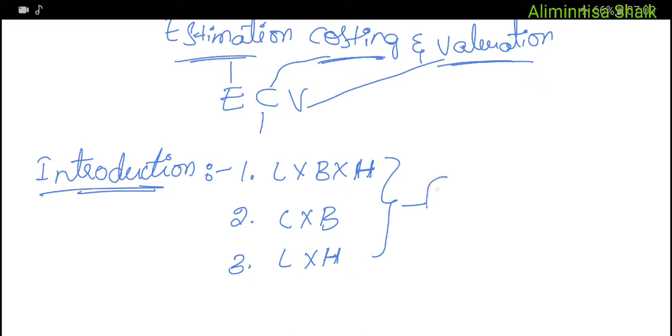Using these three categories, we generally estimate the cost of construction. It is therefore necessary to prepare the probable cost or estimate for the proposed work from its plan and specification. For these calculations, we generally use the plan of the structure, that is design, drawing, everything, and the second one we use is specification.

For calculating our estimation, we generally use plan and specification. Otherwise, it may so happen that the work has to be stopped before its completion due to shortage of funds or materials. Besides this, an estimate for any public construction work is required to be prepared and submitted beforehand so that sanctioning of necessary funds may be obtained from the authority concerned.

Estimation is generally prepared by calculating the quantities and cost of the various items required in connection with the work. Here we have different items or different requirements based on which the cost of construction can be estimated.

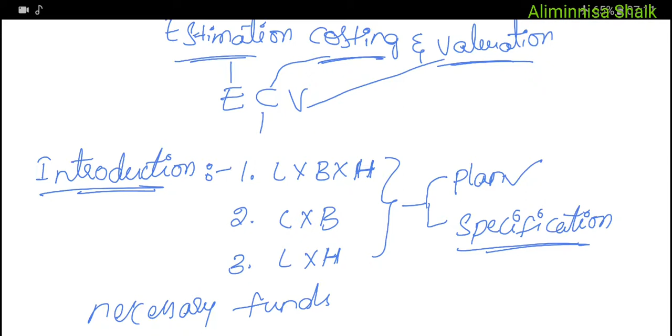Now let us move on to the next topic, that is purpose of estimation. Mainly this purpose of estimation contains 9 different purposes in which estimation for a work or project is necessary, mainly for the following purposes. First one is to ascertain... let me write it first. Purpose of estimation.

In this purpose of estimation, this is categorized into 9 types or 9 purposes. The first one is to ascertain the necessary amount of money required by the owner to complete the proposed work. For public construction works, estimations are required in order to obtain administrative approval, allotment of funds and technical sanctioning. That is the first purpose of estimation.

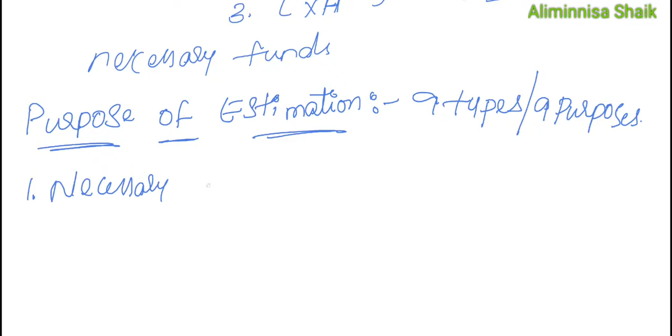This is generally used to ascertain the necessary amount of fund required for major projects.

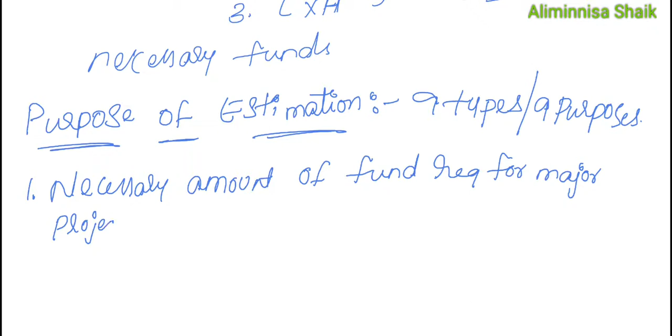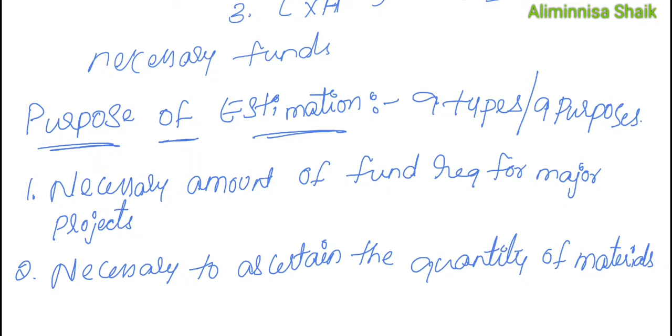The second purpose is to ascertain quantities of materials required in order to program the timely procurement of controlled materials like cement, steel, etc., which are high in cost. This is necessary to ascertain the quantity of materials, not only cement and steel, but different materials, though the cost of cement and steel is more compared to other materials.

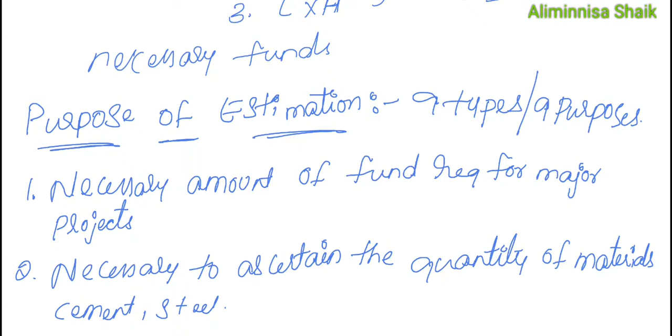So this is the second purpose of estimation, to calculate the quantity of materials required for construction. The third purpose is to calculate the number of different categories of workers that are to be employed to complete the work within the scheduled time of completion. This is required to calculate types of workers.

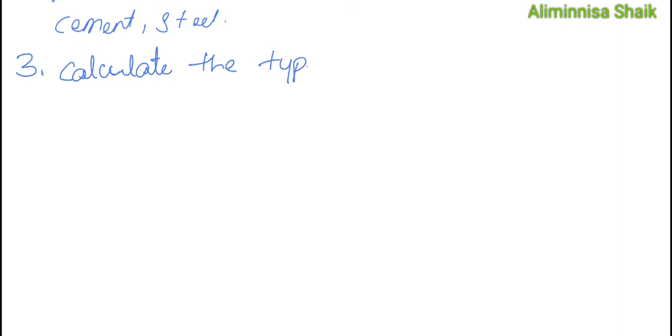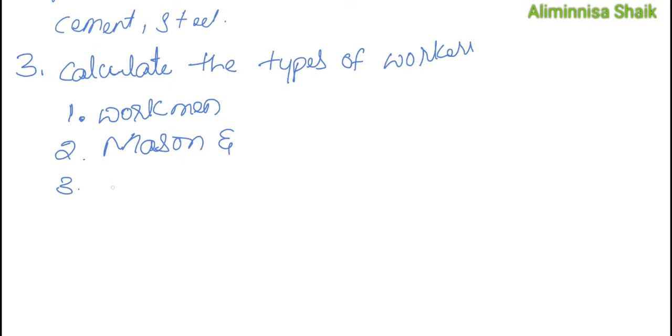Types of workers means, generally we have 3 types of workers. First one is workmen, mason, and female workers. These are the different types of workers basically used in any type of construction. So the third purpose is to calculate the types of workers and how many persons are required for the completion of the work for every day. That is the third purpose.

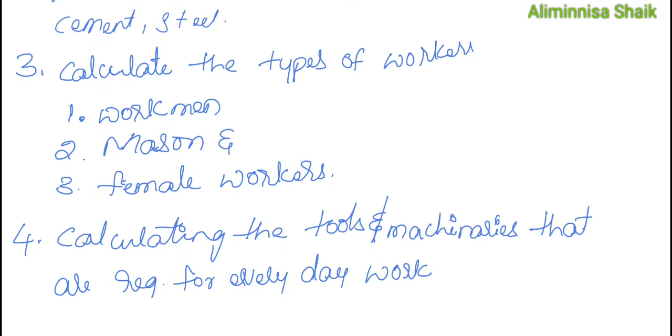Next, the fourth purpose is to assess the requirement of tools, plants and equipment required to complete the work according to the program. This is for calculating the tools, that is machinery, tools or machineries that are required for everyday work, because every day we don't use both tools and machineries at a time. Basically for the footing steps we go for tools, and for higher constructions we generally go for machineries. This is the fourth purpose of estimation.

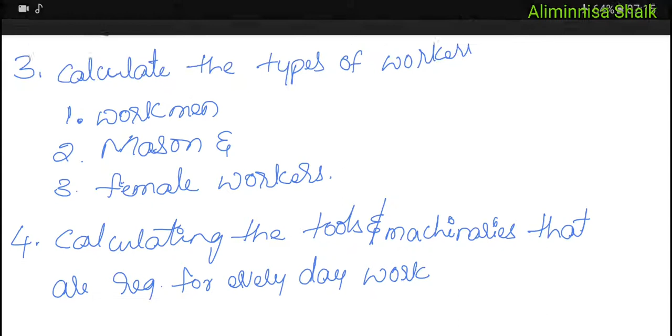Now let us go to the fifth purpose. Let me go to the next page. Next, fifth purpose is to fix up the completion period for the volume of works involved in the estimation. Fixing up of work is done in the fifth purpose.

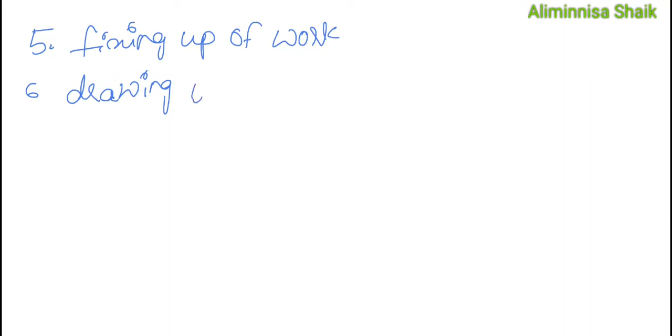Next, sixth purpose is to draw up a construction schedule and program, and also to arrange the funds required according to the program. Here we'll be drawing up the schedule, which is nothing but where we'll be collecting materials, men, machineries, everything whatever is required during construction. That is the sixth purpose. Generally we have a different subject for this, PERT and CPM, where we'll be learning how to schedule the works.

Now our next purpose is to justify the investment from benefit cost ratios. Here what we are going to invest and how much quantity of work that is going to be completed during that day, we'll be doing a benefit cost ratio.

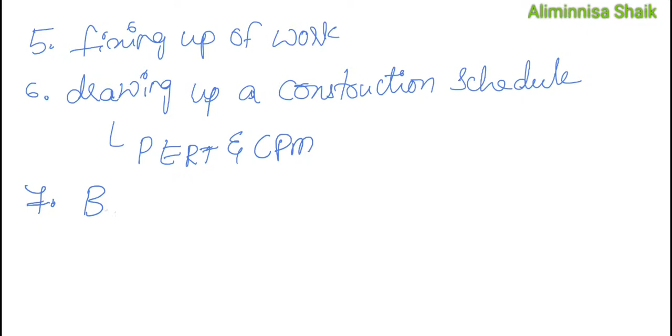And the seventh purpose, and the eighth purpose, is to invite tenders and prepare bills for payments. Here we'll be inviting tenders and contracts for high-rise buildings or high-rise structures.

And the last purpose is an estimate for an existing property is required for valuation. For any existing property, valuation and estimation is basically required. That is our ninth purpose of estimation. Now let us move on to the next topic, that is general items of work in building. Let me go to the next topic.

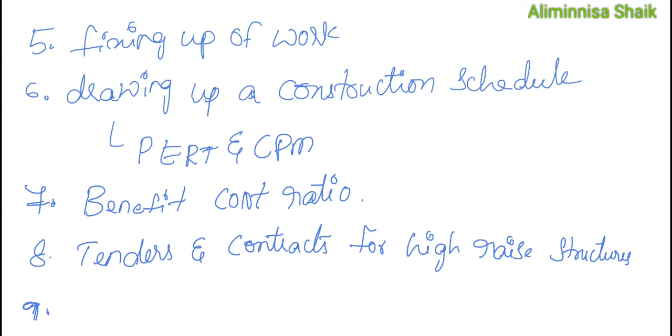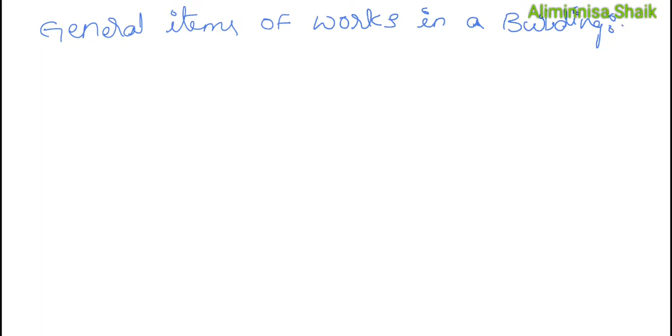General items of work. I'm writing it here. General items of works in a building or any structure. Let me write building only. This is the general items of work involved in the estimation for a building, along with the process of calculation, listed below.

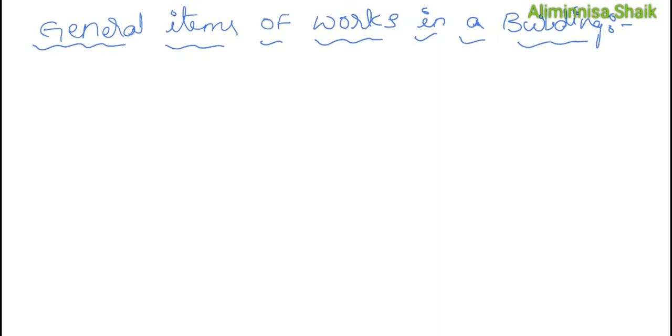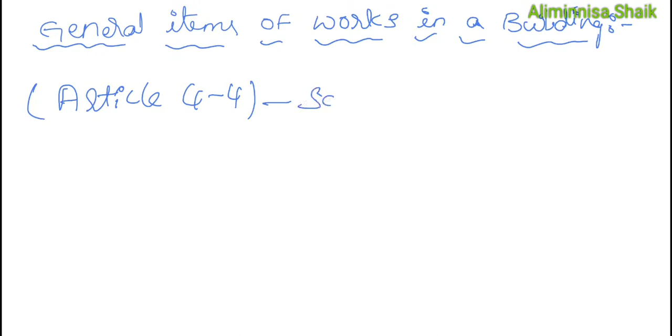The unit of payment and mode of measurements are classified based on the mode of measurements from Article 4.4, which is used for scheduling cost or specification. The nomenclature of the items are given in the abstract of building estimates.

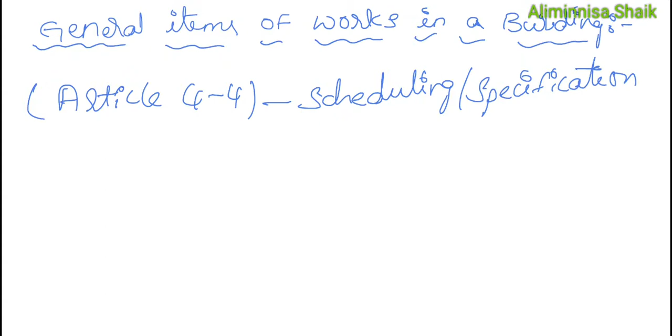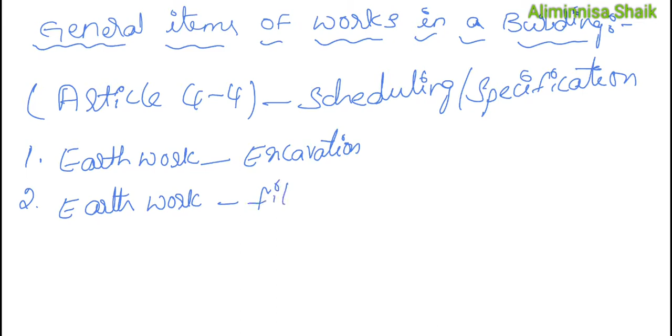The general items of work for buildings, we basically have 18 types of general items of works. Let me write one by one. First one is earthwork in excavation for foundation trenches. Second one is earthwork for filling. So the first one is for excavation, second is for filling. Third one is brick flat soling.

Next, cement or lime concrete in foundation. Next one is masonry work in foundation and plinth.

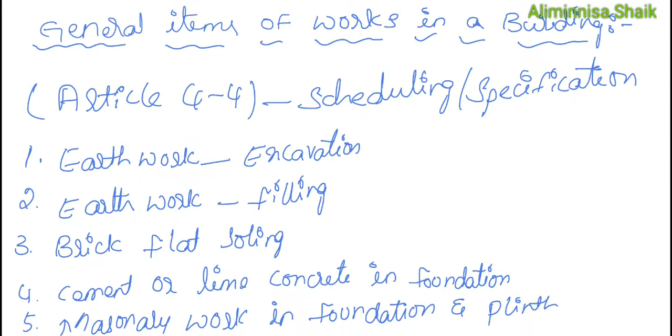Before going to the next page, let us know what each work means. Earthwork in excavation is where earth is excavated for foundation trenches. Trenches are nothing but openings where we'll be putting our footings, to the exact width and depth of foundation, with vertical sides and the bottoms leveled both longitudinally and transversely.

The quantity of earthwork is calculated in cubic meters. Generally both earthworks are calculated in cubic meters, by multiplying the actual required length. This multiplication process, as I said before in the introduction, we basically do in three different types. First is length, breadth and depth. Second one is length into breadth. Third one is length into depth, or length into height.

So those are the three things. When we get this cubic meter, we will be calculating it in all three dimensions, that is length into breadth into depth or height, it may be D or H. This earthwork is basically measured in cubic meters, where we will be calculating the length of the excavation, breadth of the excavation, and depth or height of the excavation. That is about earthwork.

When it comes to earthwork in filling, earthworks are engineering works created through the process of moving massive quantities of soil or unformed rocks. Earthwork is done to reconfigure the topography of a site to achieve the design level, and this involves cutting and filling to achieve the required topography.

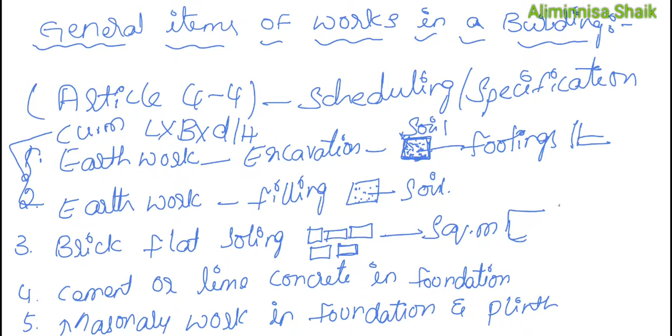Soling is worked out in square meters, calculated as length into breadth, or length into depth or height. When we get cubic meters, it is in all three dimensions. When we get square meters, we are calculating the values in only two directions, whether length into breadth or length into depth or height. That is about brick flat soling.

Now let us move on to the next topic, cement or lime concrete in foundation. The volume is computed in cubic meters, meaning length, breadth and height - all three dimensions are used. The dimensions of length and breadth for concrete remain the same as that of earthwork when the sections of all walls are constructed. That is about cement or lime concrete in foundation.

Now let us move to the fifth one, masonry work in foundation and plinth. Here the volumes of different offsets of layers and plinth walls are calculated one by one in cubic meters, multiplying their individual length, breadth and thickness or height. Instead of using depth and height, we calculate it using length, breadth into thickness.

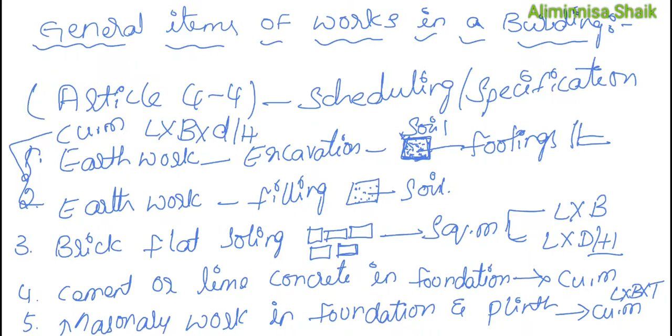Okay, we have completed 5 types. Now let us move on to the next work.

The sixth one is damp proof course, which is called DPC.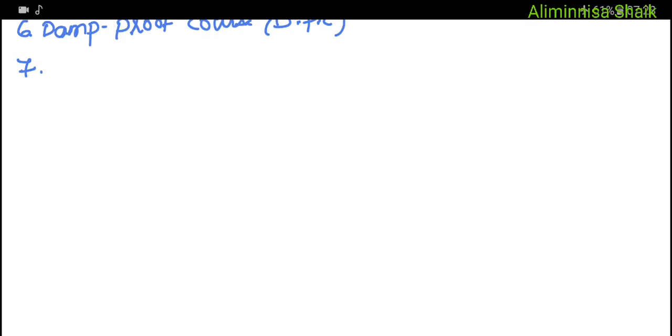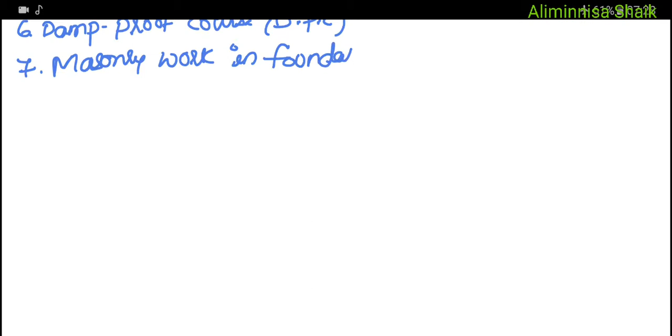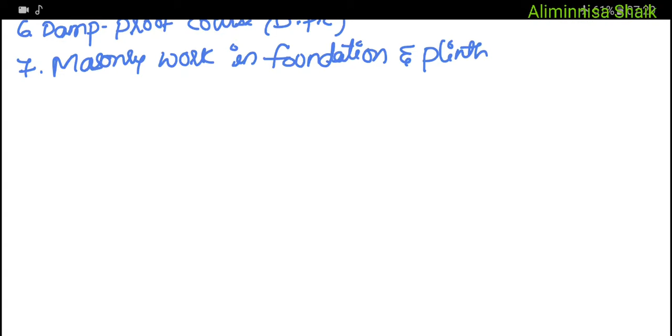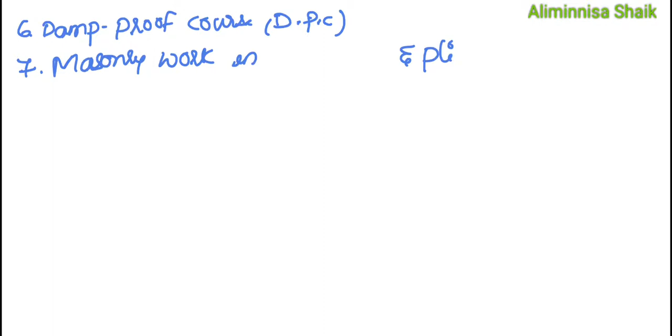Next one, the seventh, is masonry work in foundation and plinth - sorry, that is completed. Masonry work in superstructure walls.

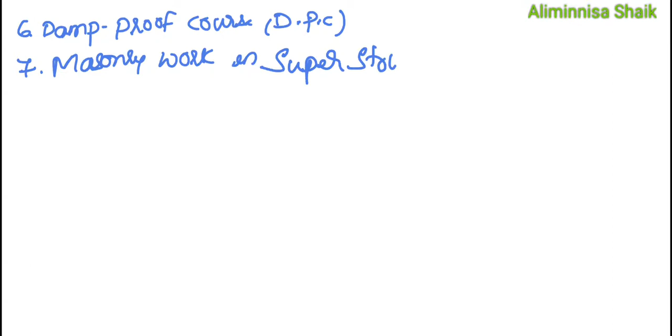And the eighth one is 10 centimeter thick brickness, or brickwork.

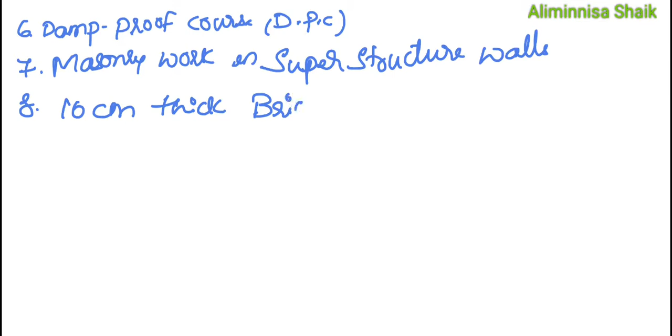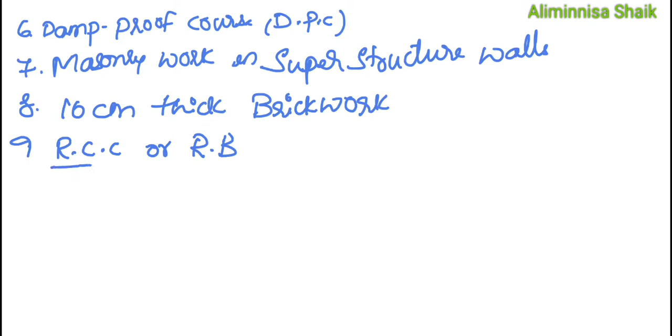Next we have RCC or RB. RCC is reinforced cement concrete, and RB means reinforced brick.

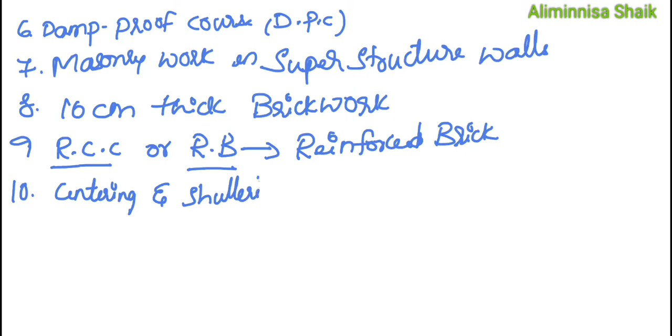The 10th one is centering and shuttering. The 11th one we have is steel work. Next is lime terracing. The 13th work we do is woodwork for doors and windows.

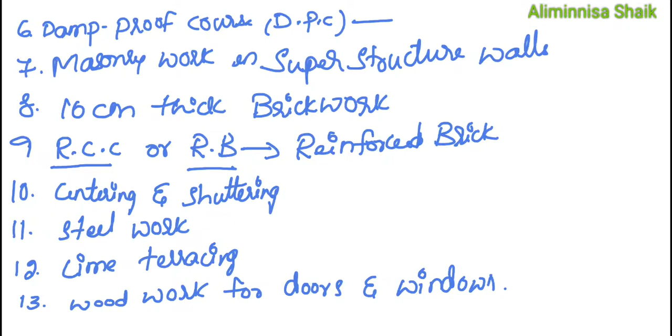Okay, let us go to the topics one by one. First is damp proof coursing. This is usually a layer of cement concrete mixture in the proportion 1:2:4, mixed with waterproofing compounds, laid between the plinth and superstructure walls to prevent the rise of water by capillary action from the ground. Only the area between the plinth and superstructure wall should be considered in the calculation to find out the quantity of DPC. Generally we use a 1:2:4 ratio for calculating the damp proof course.

For masonry work in superstructure, for walls up to 1 brick thickness, that is 20 centimeters, the volume is calculated in cubic meters - length, breadth and height. After calculating the volume of brick, standard deduction for volumes of openings, that is lintels, openings or any such others, are made as per the standard rules of deduction prescribed by IS 1200, to arrive at the estimated quantity of brickwork. So that is about masonry work in superstructure.

Openings is nothing but your doors and windows. Here I mentioned the words openings and lintels. Lintel means a small beam, which you all know, which is passed over the height of the door level - that is your lintel. And opening is nothing but your doors and windows.

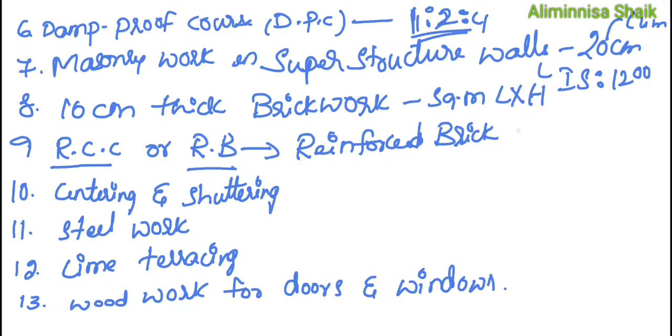Next, let us move on to RCC or RB, where RCC means reinforced cement concrete and RB means reinforced brick. Reinforced concrete may be used in columns, lintels, beams, and roof slabs, etc. This quantity is worked out in cubic meters, that is length, breadth and depth. Here depth is taken including reinforcement. The volume of reinforcement is not deducted from the volume of concrete.

If reinforcement or shuttering is included and considered as a consolidated item, this should be fully described and measured in cubic meters. Reinforced brickwork in lintels and roof slabs is measured in cubic meters, as in case of RCC. Chhaja is included with RCC work.

Chhaja is nothing but your shadow part. In front of a window, we'll be putting a shadow thing for getting shade and for protecting from rain, that is called your chhaja. Okay, now let us move on to the next topic, centering and shuttering. The cost of formwork...

Centering and shuttering is nothing but all the formwork that is basically done before our slab is put in place. Before putting the slab, we'll be arranging all the wooden sticks and some flat board so that we get a flat slab. That is called your centering and shuttering.

The cost of formwork is about 30% of cement concrete. Specified formwork is measured separately in square meters, calculated by multiplying length and breadth. Measurement is taken of the actual surface in contact with concrete or any other material requiring formwork. Generally, the surface area of the built-up concrete member is measured for centering and shuttering.

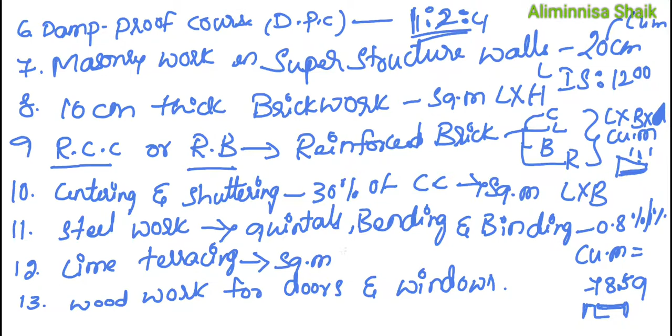Next is lime terracing. This is calculated in square meters, that is length into breadth. The average consolidated thickness is described. The clear surface area between parapets is measured. The inserted portion is accounted as brickwork for the parapet. So this is about lime terracing.

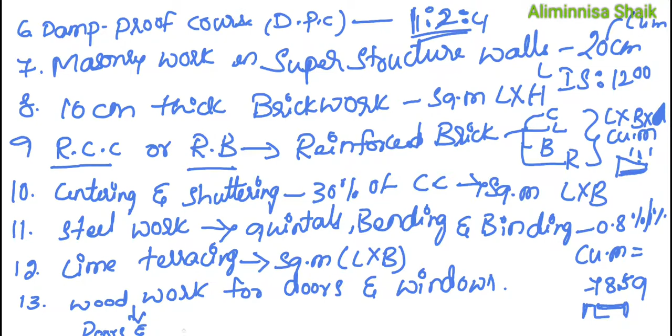Now let us move on to woodwork for doors and windows. This woodwork is subdivided into two categories. First is woodwork for doors and windows with frame. Second is woodwork for doors and windows leaves or shutters.

Let's go to the first one. The quantity is worked out in cubic meters for both. The total length of the frame is found first and this is multiplied by the two sides of its cross section. Doors are now provided without a bottom sill, so the total length of door frame is equal to 2 verticals plus 1 top size of the door or window, meaning the size of the opening.

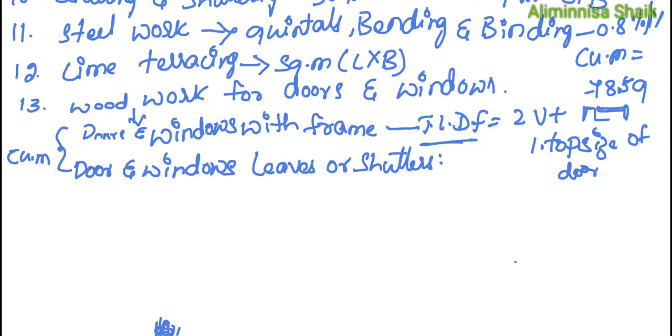For window frames with a bottom sill and with an intermediate member in between the top and bottom members, the total length is calculated as total length equals 2 verticals plus 3 horizontals. So this is about doors and window frames.

Now let us move to doors and windows leaves or shutters. These shutters are measured in square meters, multiplying the height by the breadth. Here instead of taking length, we calculate height and breadth. The depth of rebates in frames, usually 1.25 to 2 centimeters, is added in the measurement.

For double shutters, the overlapping at the center between the leaves is not accounted. For free movement of shutters, a small gap of about 5 mm is provided at the bottom of shutters. Considering the high cost of shutters, measurement should be taken excluding the clearances. So this is about doors and windows, leaves or shutters.

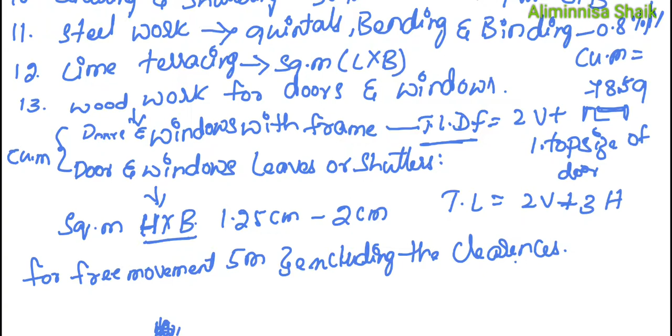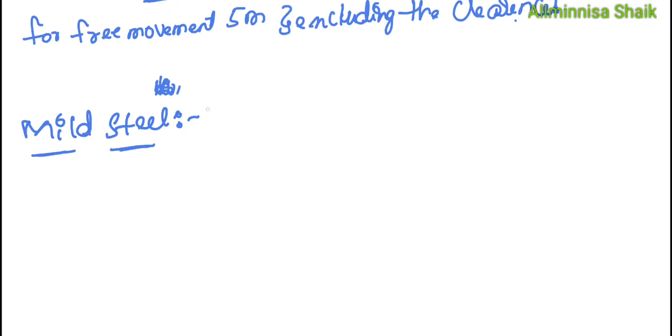Next one is mild steel clamp or hold fast. This item is enumerated, that is counted by number in the estimate. Here instead of using quantities, quintals, kgs, kilos, we go for counting the numbers for mild steel. Generally 6 numbers of clamps at 3 numbers for every vertical member for door frames are provided in the estimation. For window frames, 4 numbers of clamps at every 2 numbers for each vertical are considered. The size and type of clamp is stated in the description. The item may also be paid in kg after measuring the weight of one such member. This item includes fitting

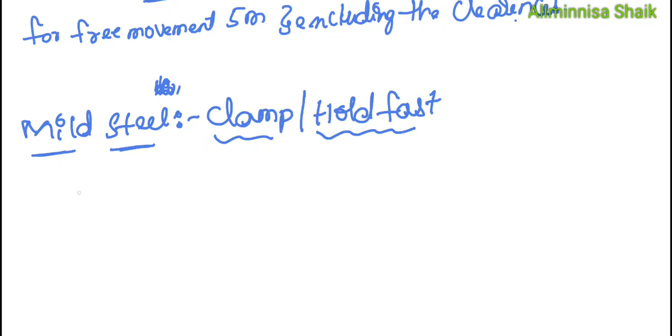and fixing with cement concrete, which is in 1:2:4 ratio. Cost of cement concrete may be included or paid separately. Here the cost of cement may be included or paid separately.

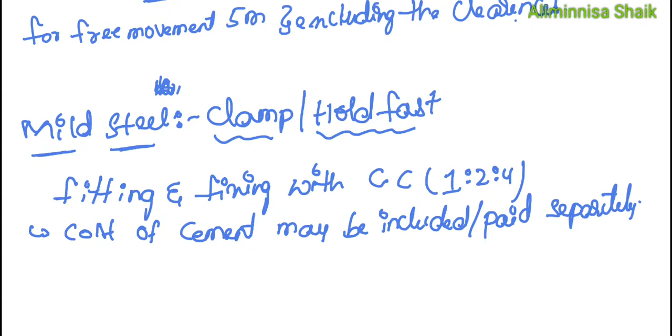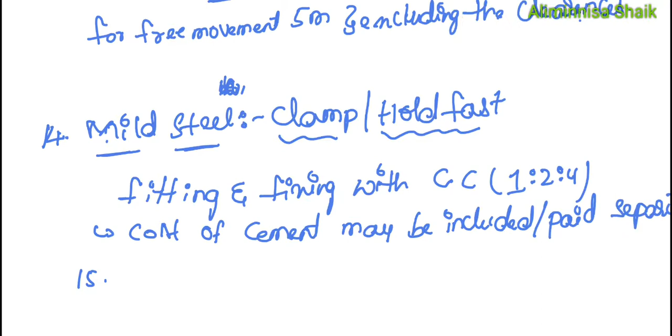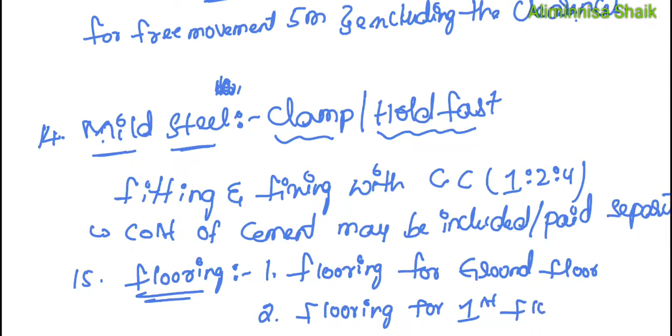The next thing we have is flooring. Fourteenth one... fifteenth is, this flooring is divided into two types. First one is flooring for ground floor, and the second one is flooring for first floor or subsequent top floors. For ground floor

means floor on plinth. The floor consists of two parts. First is the bottom or bed of floor, usually provided with 7.5 centimeter thick lime concrete, that is in ratio of 1.5:2:7. This is the ratio of bottom or bed of floor. Or concrete ratio is 1:3:6. Concrete ratio will be 1:3:6 over a brick flat soling containing of green concrete with earth below it.

The top part above the base may be of different types such as 20 mm to 35 mm thick artificial stone flooring finished with 3 mm to 6 mm thick topping with coloring pigment, highly polished and grinded. The top part may be 9 mm to 12 mm terrazzo or 20 mm thick worked precast tile set in lime or concrete mortar bed. So this is about flooring of ground floor. Here we'll be using different types of materials for ground flooring, whether it may be marbles, tiles or any other thing, granite. We have many things for flooring. We'll be using ratio of cement concrete as 1:3:6 for bottom or bed floor.

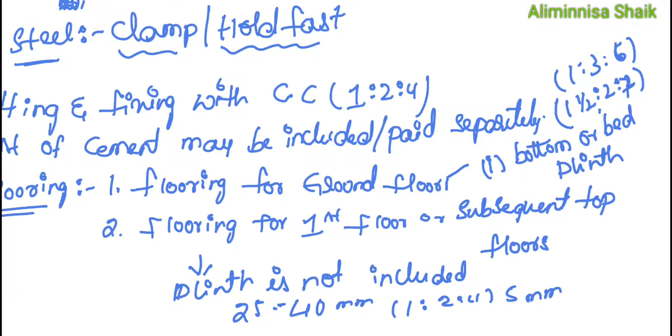Then let us move on to the next thing, that is first floor or subsequent top floors. This flooring is done on the roof of the lower story, so that flooring requires only the top part. Here plinth is not included. For ground flooring, plinth is included, and for first or subsequent top floors, plinth is not included. To make a finished top of the roof surface, a layer of 25 mm to 40 mm thick cement concrete, in ratio 1:2:4, with 5 mm stone chips, is provided in case of artificial stone flooring. In the case of terrazzo work, a layer of cement or lime concrete mortar bed is provided. This is about first flooring or subsequent top floors.

In this also we can use different types of materials. It may be tiles, marbles, granites or any other things. Or it may be a plain concrete, plain CC. So we can go for any type of flooring.

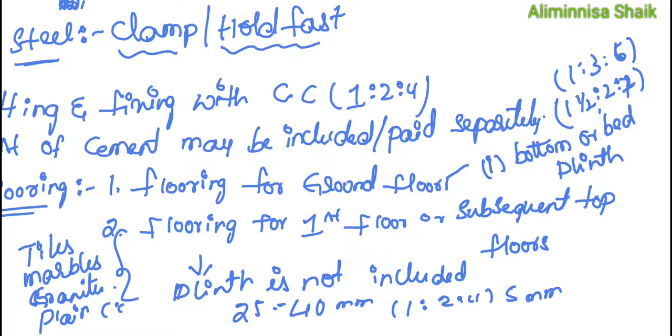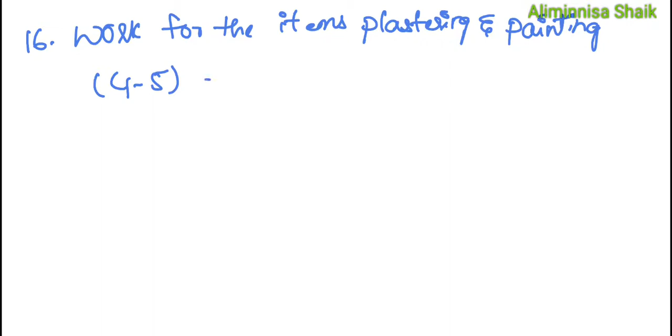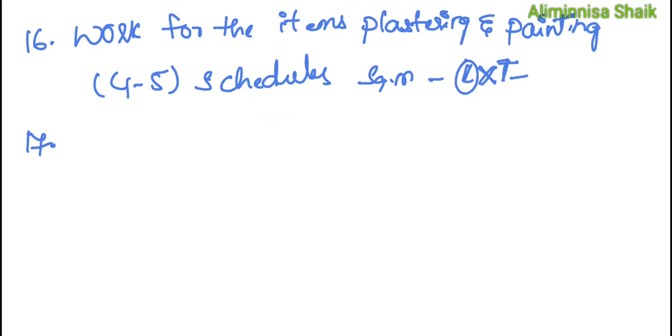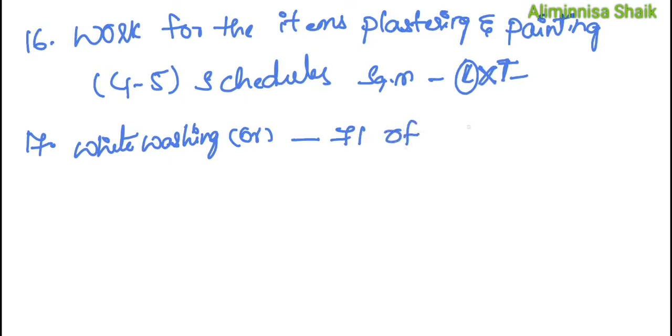So the next item of work is whitewashing or coloring. This is also taken from article number 69 and 70 of Article 4 to 5. Coloring or distempering, here we have to use schedule 4 to 5, item number 71, of Article 4 to 5. This is also calculated in square meters, where length and thickness of the painting is taken. And the last one we have is painting to woodwork.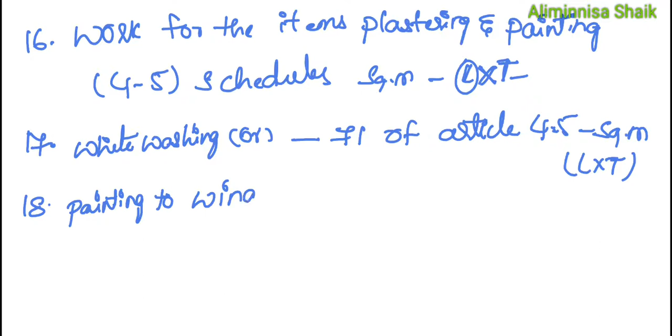And for any other items of building work, we'll be describing from article number 71. Here it is also painting, no? So we can go for article 71, item number 71 of Article 4 to 5. Painting is also calculated in square meters, where we'll be taking length and thickness of the paint or whatever material is used for painting. So these are the different items of works we are having.

That's about today's session. I think everyone has a clear vision of it. If you are having doubts, I'll be clarifying it later. Thank you.